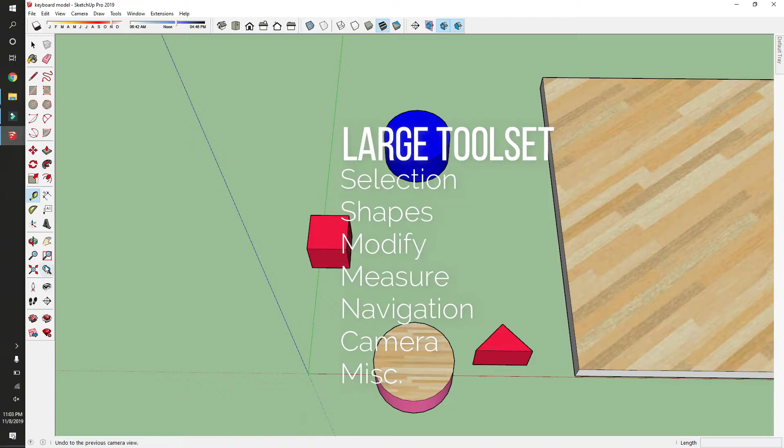Below that we have the navigation category tools. They're not in any other toolbar. For example, we have zoom window that we could draw a window, but the power tool is the zoom previous, to quickly jump back to the last view you were looking at. We also have zoom extents.

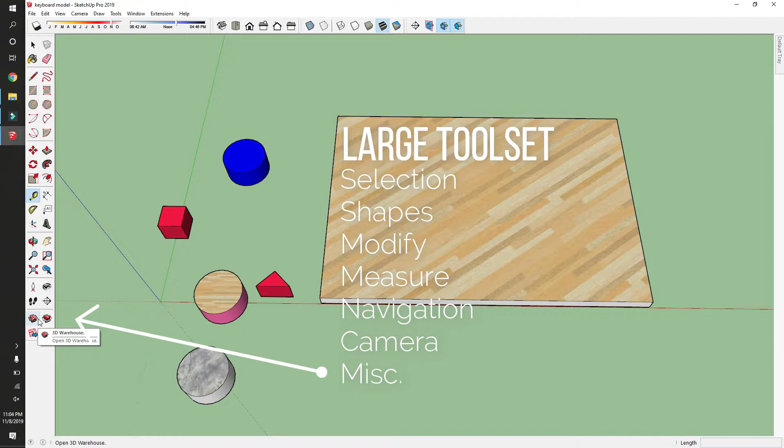Below that, there are some advanced camera tools, your sections and planes all wrapped up nicely right here. And then lastly, you have some extension toolbars that come in the large tool set. You can remove them, but we never really take it to that level unless you absolutely want to.

Let's look at the toolbars up top. We have our shadows toolbar, which is super handy. It allows you to quickly turn it on and off the shadows to speed up your workflow.

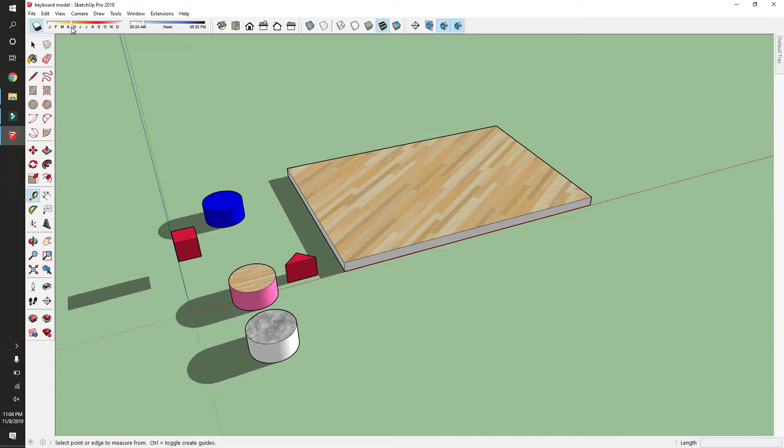Let's orbit around, zoom out, put the shadows on, and use the sliders to adjust the length and position of the shadows. As you model, having the shadows on takes a lot of processing power. So you can quickly shut them off here and go back to modeling or your presentation very quickly.

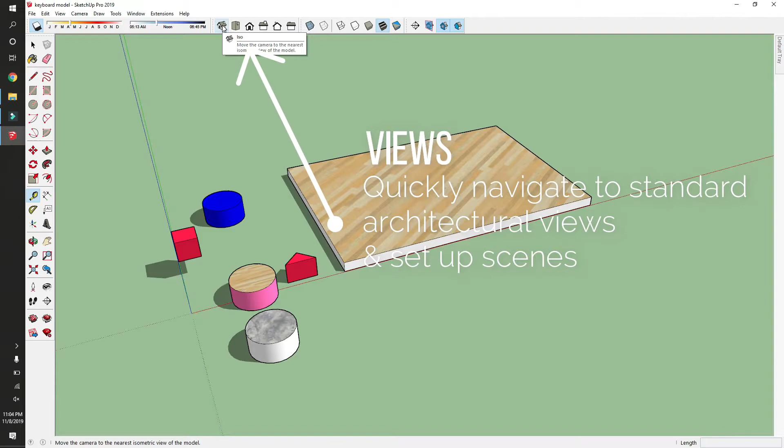Next we have the view toolbar. It has your standard isometric view, top view, front, right, back, and left. Super handy to quickly set up scenes. They represent your basic architectural views.

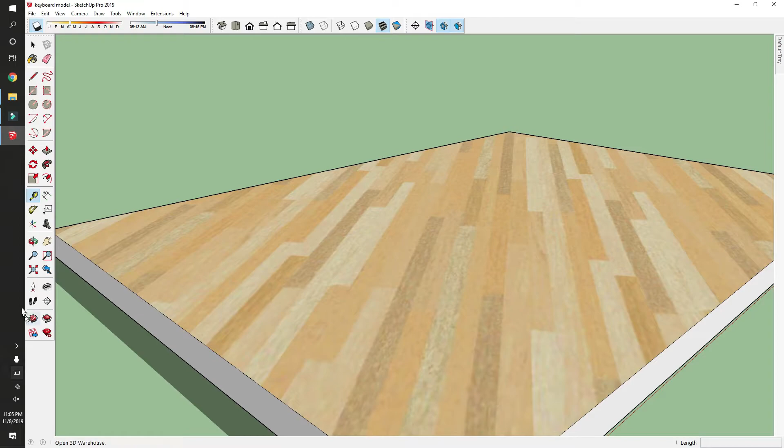It's also a super quick way as you're modeling, if you're really zoomed in on something, to get to another view of it and zoom out to get a good look at what you're doing.

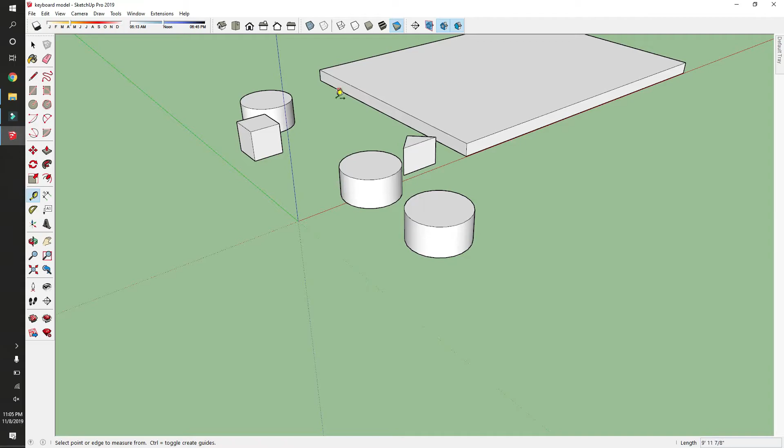Next we have the quick styles toolbar, and we'll deep dive into styles again later in your tray. But this allows you to quickly turn on and off your materials and loaded JPEGs to go from your presentation scenes quickly into a workflow and have better, quicker performance.

You can shut off all the colors to look at a white box model. If you need to see through things, you can go into wireframe mode. One of my personal favorites is the X-ray mode.

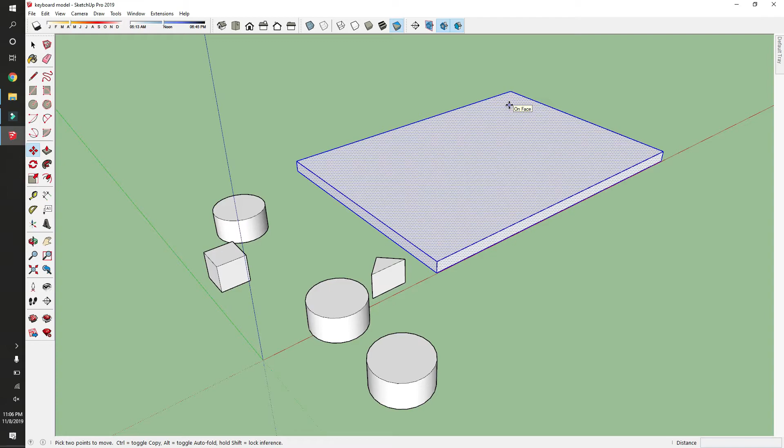I'm going to use the spacebar and grab this guy. I'm going to move him over. And let's say I want to move him by an endpoint I can't see. I could use that X-ray view to find that endpoint. And then shut it off when I want to go back to my presentation scene.

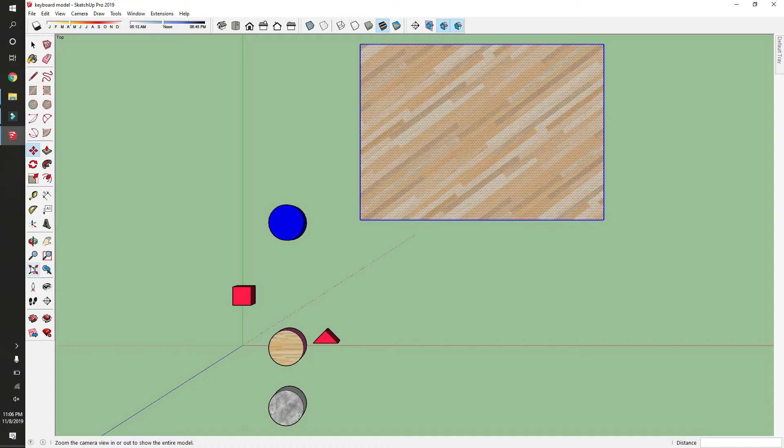Now I'll quickly look from the top, zoom extents, and I'm quickly in and out of parts of the model.

I also like to keep the section toolbar open so I can quickly cut sections. With the section marker, I can toggle the actual section plane on and off. I can toggle the marker on and off.

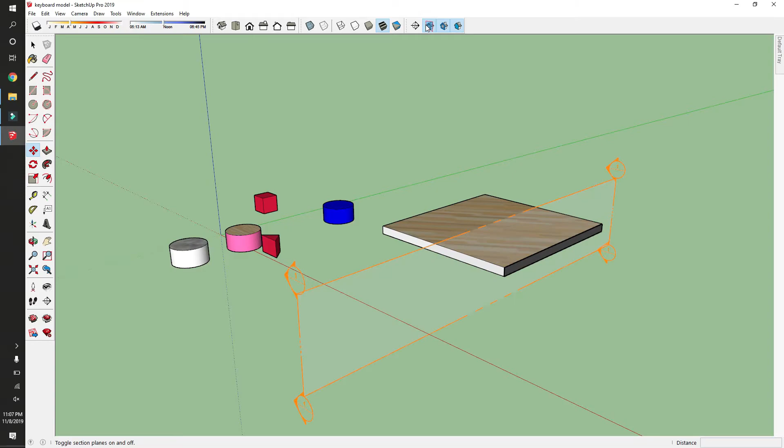And this one is for the fill. From the side, you could see in the box, or I can give it a fill and make it look more like an architectural drawing. And we can quickly shut it off.

You want to use all of these tools in conjunction with what's in the tray. So let's look at what's in the tray. Let's pin it open, and here's the most effective tools.

Entity info up top. That gives you everything you need to know about the objects in your model, your material, your layer, maybe a component name, also whether or not it casts or receives shadows.

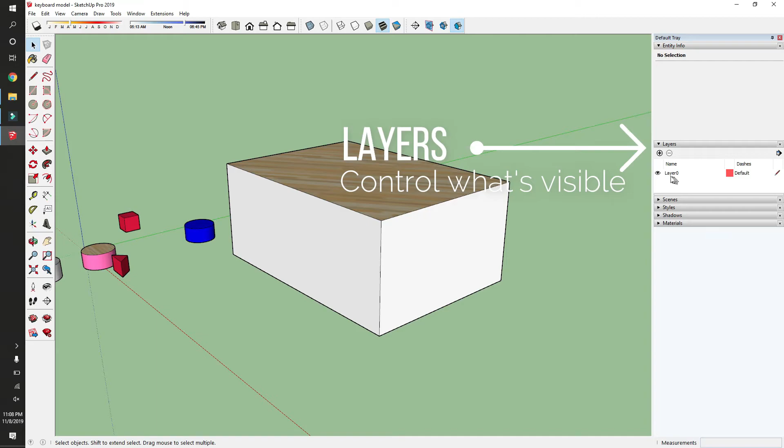Next we have layers, and we'll set those up in a future video. This is where you would create layers and using the entity info to assign those layers to objects.

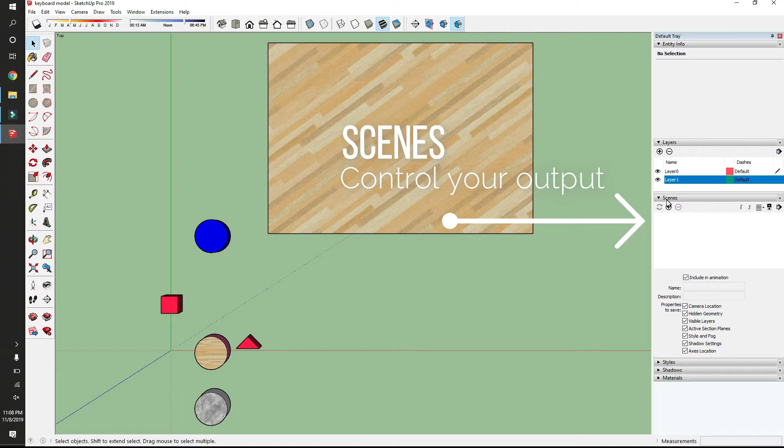After that we have scenes. So let's look at the top, get a nice little crop view of it, and add a scene. And call it top view. Your shadow settings and styles can be assigned to each scene that you have. There's a large list of things that are updated when you update a scene.

Styles, these are global styles. And what happens is you may have different views and scenes that have different styles applied, like a 2D plan view or a presentation view.

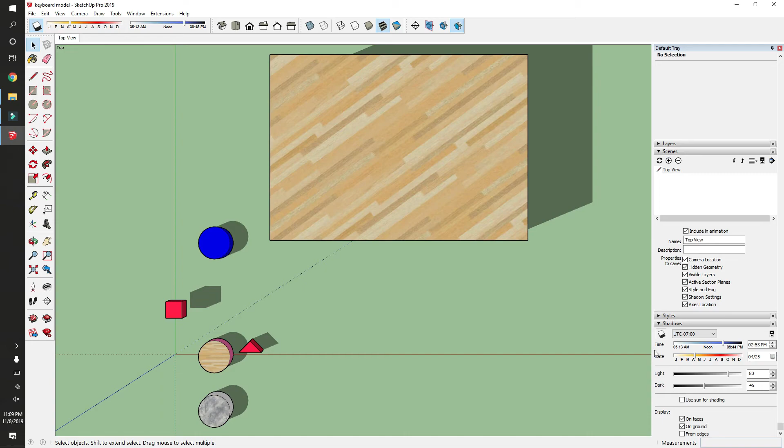We do have shadows again in the tray because it gives a little bit more control over the shadows, including the handy sun for shading option. We can also have control about the brightness without the shadows actually being on.

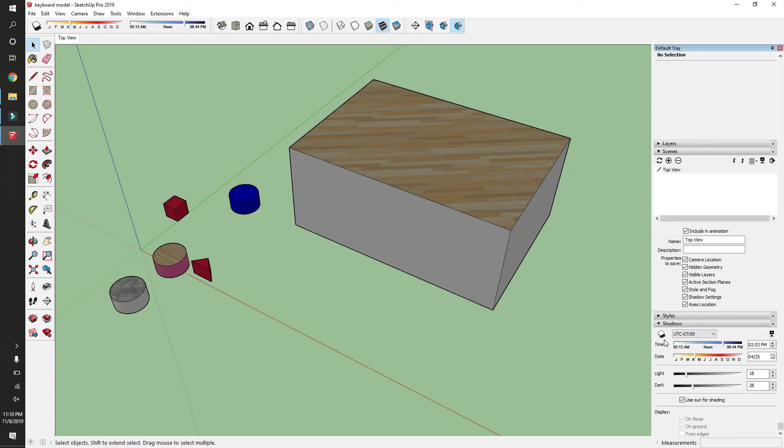And we also have the materials that we went over last lesson. These are the power tools that we like to use most.